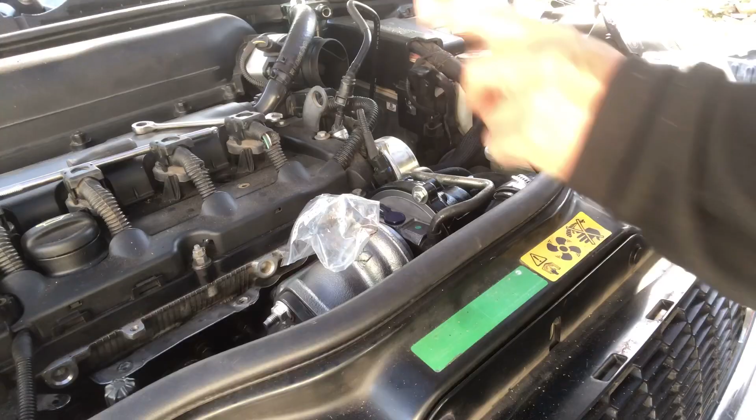Okay, so the first thing you're going to do is find where your oil feed line goes in, which is right here. I have my oil feed line covered so no dust gets in it. Just pull the little plug out. Grab a funnel. At least mine doesn't fit in the hole perfectly, but it's centered over there, and pour some oil inside of your turbo. Make sure your drain line is already hooked up.

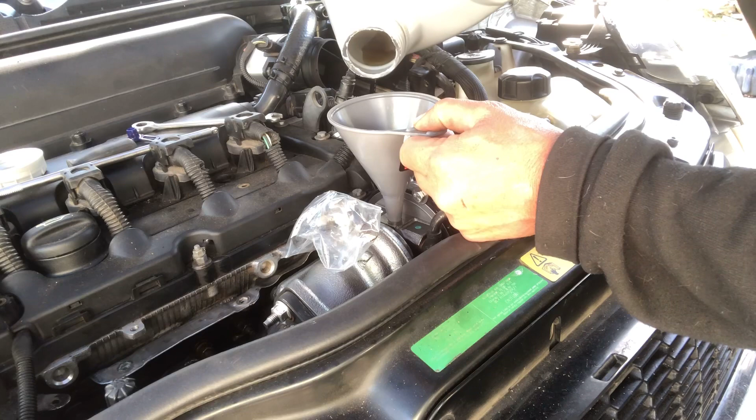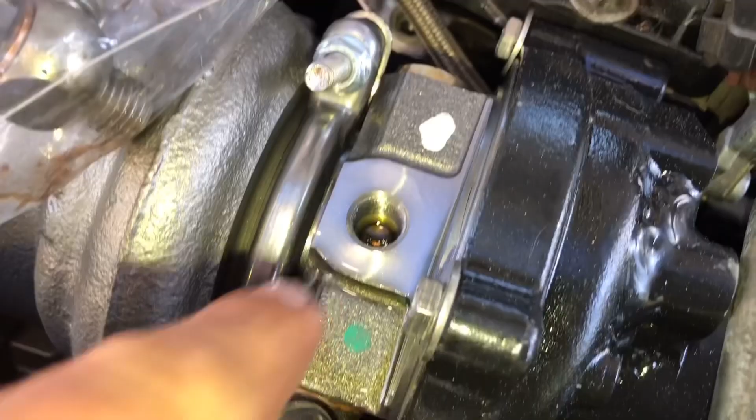Then take your finger, put it inside the compressor wheel, and rotate the compressor to get oil onto the shaft. You should see the oil draining, so you'll know that your drain is working. And this is where you're putting your finger in. Can't really see the shaft in there, but just get it in there and turn the compressor wheel.

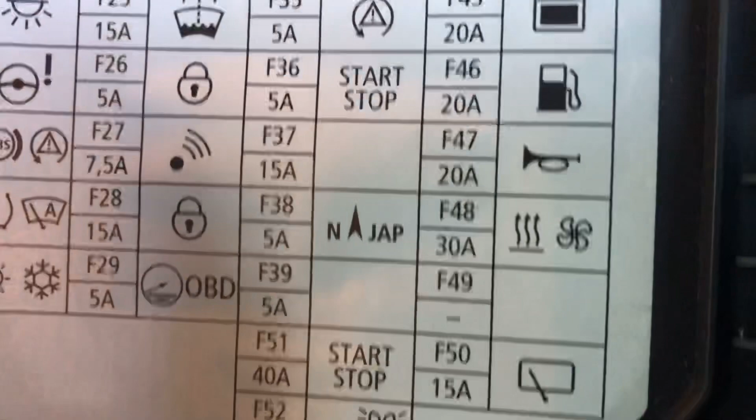Okay, next you're going to want to open your fuse panel and find your fuel pump fuse. It's going to be the one with the fuel pump on it, right above the horn. Right there. So it's F46. It's going to be a 20 amp fuse. It's going to be this yellow fuse right here. So I'm going to go ahead and pull that out. So you want to make sure you get the right one.

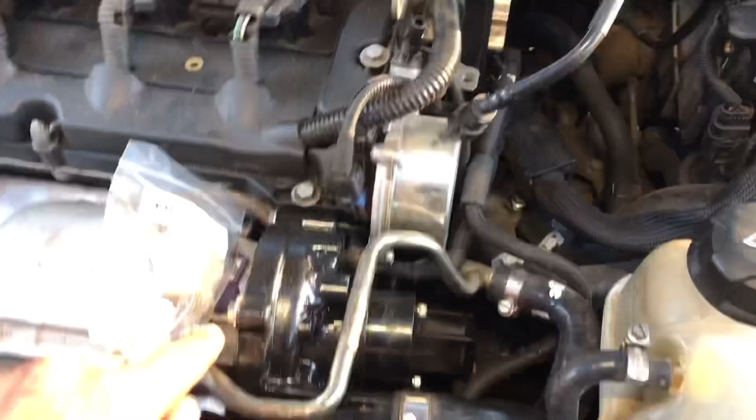Okay, now I'm going to go ahead and reinstall my oil feed line and my intake, and we'll go from there. Okay, now put your key in the ignition and try to start your car, but it shouldn't start with no fuel. If you have fuel in the fuel rail, it might start for a second, so you might want to unplug your ignition coils, but mine isn't going to start, I don't think.

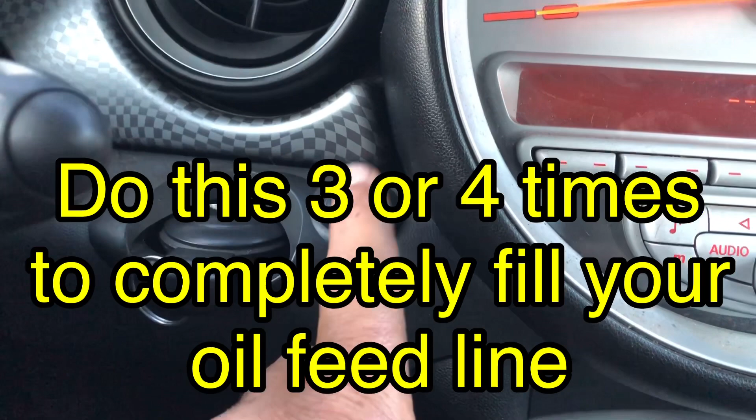Okay, so now go ahead and put your fuel pump fuse back in. At this point you can go ahead and start your car. It should be able to run. My car's still on jack stands, and the reason for that is because I'm going to start it. I'm not going to do it on camera, but I'm going to start it, get under there, look, and make sure I don't have any oil leaks. The reason I'm not doing it on camera is because I want to make sure I'm doing that and not worried about filming. But just make sure you don't have any leaks.